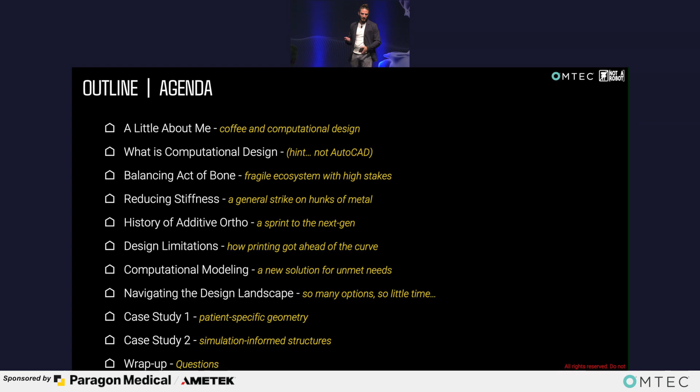Why use this as a resource versus traditional CAD? Why does it go hand in hand with 3D printing? And then we're going to go through a couple case studies. I am a daredevil, so these are going to be essentially live demonstrations. I would like to leave enough time for questions. I've got my eye on the clock for that.

So first, a little bit about me. My wife and I have 4 kids, plus one on the way due in August. We're a very musical family. I think a lot of the times engineering goes hand in hand with people who are also very musically expressive. So my wife and I have both been playing the piano ever since we were 4 or 5 years old. I like to say that my house is akin to living in a real life musical because all of my children are singing at one point or the other, and you never quite know what it's going to be.

I love coffee. So if any of you have a chance to talk to me afterwards and you're also a lover of coffee, not only do I roast my own beans, but I also have just about every brewing method of coffee that I think is out there, except for Turkish coffee. I still need to acquire that stuff there, but I love coffee.

And then, I've spent the last handful of years working in the orthopedic space, specifically on the biomimetic aspect. So it's how we use and leverage computational tools that are available to us nowadays to be able to take things that we find in nature and adapt those for human use products. So not necessarily just in the orthopedic space, but I also have actively worked in projects that are in consumer goods, wearables, filtration systems for sand filtration, as well as heat transfer systems.

And then there's just a few of the companies. Somebody once told me that recently it feels like I'm collecting companies like somebody collects rocks. So just a few companies that I'm involved in. Some of them at least are initiatives for public education. So like Lattice Robot, give it a Google. It's basically just a catalog for people that don't know about lattices to learn about lattices, and sort of a fun free project that me and a couple other people were working on.

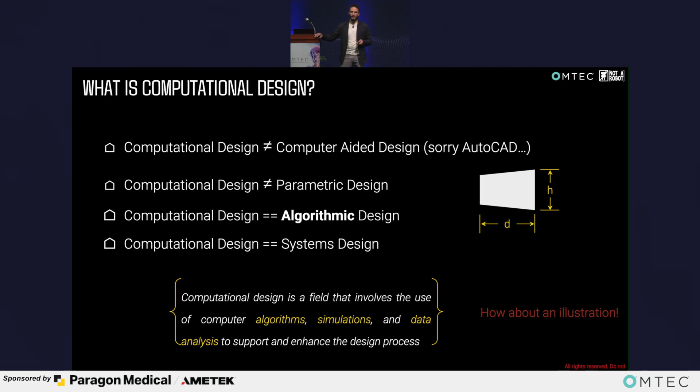Most of the workflows that I build for customers include some sort of variables where they can adjust parameters. But the way it goes about those steps is a little bit more computationally intensive. It may include simulations. It may include other calculations outside of what the engineer can directly control through data input. I'm going to try to give an example.

So I was thinking about this just the other day as I was mowing my lawn. We've got a pad that we poured. We're going to put a shed there. I don't have a zero-turn mower. I've got a lawn tractor. It's better than a push mower. But I realized that I couldn't quite mow the square perfectly, right? Because I can't turn my mower in a way that lets me cut perfectly to the corner, turn, and cut over to the next corner.

So I got to think about what algorithm or series of steps would I write in order to mow this thing most efficiently. And so the first thing I started thinking about, well, I could go straight, cut, take a U-turn, cut down the other line, and then do that essentially in a 90. What that leaves is essentially these semicircles of space for cutting. As you enhance or grow those semicircles, eventually you morph into the circular pattern or oblong pattern, since the patio is

longer in one direction. So I'd like to take this to three dimensions just to show you something that I'd like to chat about. If we can get there. So does anybody know what would happen if we added a sphere to a cube? That's a little bit of a rhetorical question. And some of you that are used to more traditional CAD might be raising your eyebrows and saying, that doesn't really make any sense. How does a sphere get added to a cube?

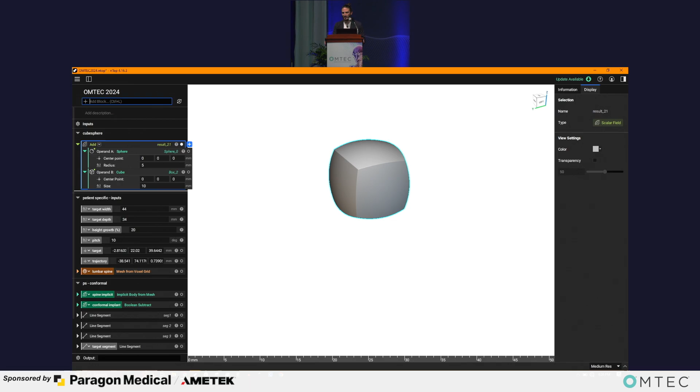A lot of the time, lattices, complicated structures, surface roughness are things that we encode with an algorithm that we couldn't possibly create by hand. These are extraordinarily complicated things. However, the downside is that it introduces a level of ambiguity into the design that the human doesn't have control of anymore. The engineer can assign and create algorithms, they can have feedback through various systems, but in order for them to have full control at the level that a med device requires, there ends up being some ambiguity. So let's say we multiply the sphere.

We're going to multiply the sphere by a factor. Let's just call it 0.5 for now. We'll assign that to a variable. And then what we're going to do is do a subtraction step, and we're going to subtract basically our factor from 1. And then we're going to do another multiplication step, and we're going to multiply our other object, the cube, by the remainder of that, and then we'll add those together.

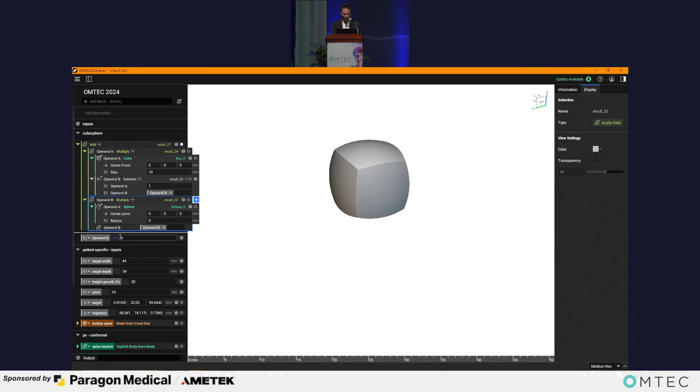So what you'll be able to see is essentially, I've not clamped this, so I'll try to be careful. But as I set this down to 0, it's a cube, and as I set this to 1, it's a sphere. Well, actually, I was hoping to do a drag and drop, but we won't clamp it. Actually, I could probably do this right here. All right. So now we can only go from 0 to 1.

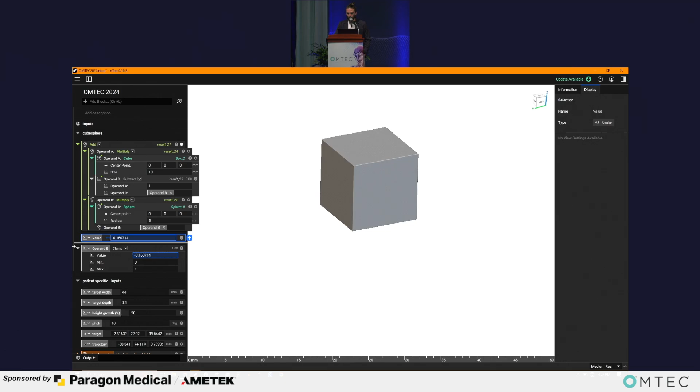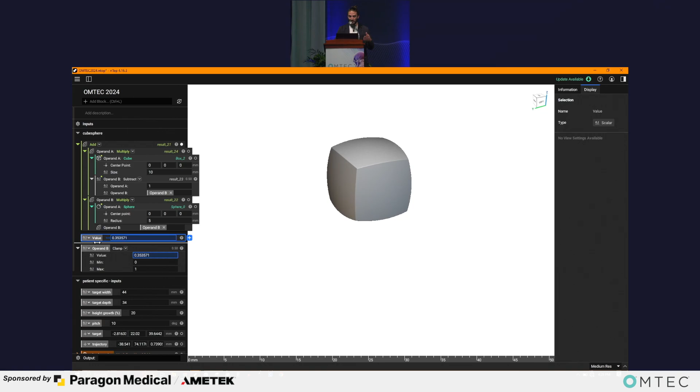So what you'll notice here when I drag between the two is we go from sphere to cube, right? If I set it at exactly 0.5, one would argue that there is equal parts sphere and equal parts cube. But in the general sense, using subjectivity here, I'm going to get a different answer if I set it at 0.4, 0.5, 0.6. Some people may still say, hey, this still looks like a cube, and we're down closer to a sphere.

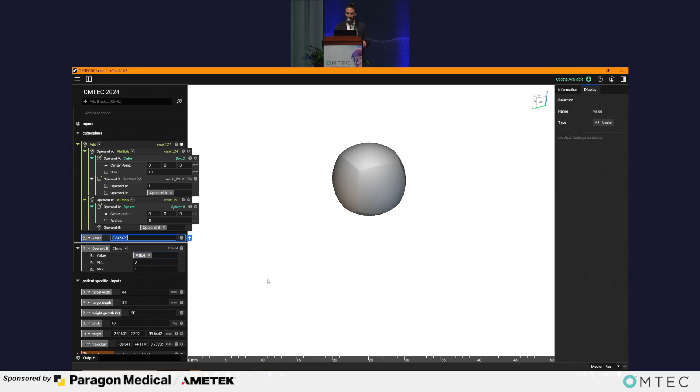So this idea that I want to drive home represents, in my opinion, a fundamental problem of the idea about computational design, which we must rectify. And it's the fact that these algorithms oftentimes are so complicated that we wrestle with how we properly define them in a regulated industry. So I would like to use this idea about the sphere cube as our nice representation. So, cube sphere. We'll call them cube sphere, or sphere cube. Whatever you want.

So how many of you guys are familiar with the idea about requirements not being ambiguous and not being conflicting, right? When we define requirements, what we need from them is that they don't conflict with each other so that all of them can be satisfied and that they're not ambiguous and too open to subjectivity. So this idea about cube sphere, I really love it because it's like, is it a cube or is it a sphere? Well, it's both, but a lot of the times in our black and white worlds, we need to force it into a box, pun intended.

So I want to revisit this down the line as we start talking about the complexity of algorithms. But first, we're going to pivot to what a lot of you will be familiar with, and that is why we need computational design in the first place. Most people are familiar with Julius Wolff's law. Basically, it's this idea that bone adapts to its local environment through mechanical loading. There's a certain amount of loading which bone likes to see. When the bone doesn't see that load, it resorbs. When it does see the load, it adds to itself.

Less people are familiar with the work of Harold Frost and the Frost mechanostat theory, which further expounds upon this general idea. And it's that there is a mechanism by which this stress and strain is monitored, and relates that to what happens in the biology of bone. And the modeling adapts to certain types of overloads, and it will remodel where it needs to. It'll take away where it needs to.

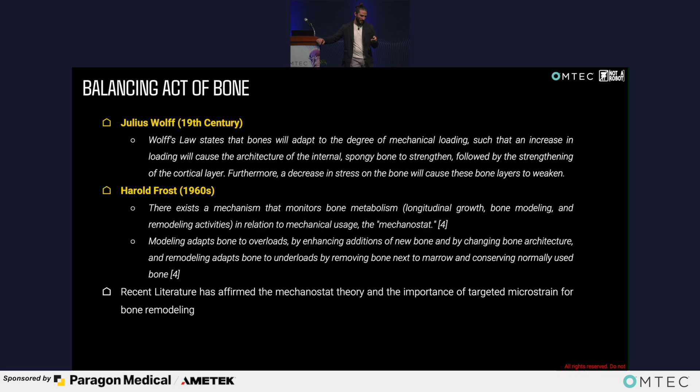Recent literature, I think a paper published in 2023, has affirmed this mechanostat theory, and researchers are still arguing about the nuances, but most people are aware that certain rates of strain are better. This is one of my favorite graphs. I love talking about it, because when we design implants, they are surrogates, right? What they intend to do is replace a portion of the body. But most of the time they do so poorly, at least biologically. They don't operate as well as what used to be there.

I apologize, I'm gonna get my phone out because I'm prone to babbling. And I wanna check the time.

So this idea that we have an overload zone where the bone actually starts to remodel itself, most people are familiar with. When we design an implant that replaces that, and we use a material that's not bone, in the vast majority of cases, there's a stiffness mismatch.

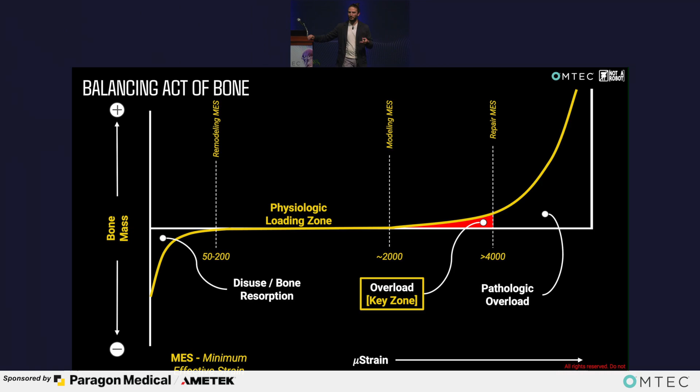The other thing that a lot of people probably realize if you told them, but don't necessarily when they're designing it, is the fact that we're designing static things to go into a living system. Bone, if we're trying to truly mimic bone, the trabecular nature of bone has the ability to resorb itself where it sees a fracture, right? If it sees loading in a certain spot and not loading in a certain spot and it fractures, it's going to resorb itself to make use of those materials somewhere else.

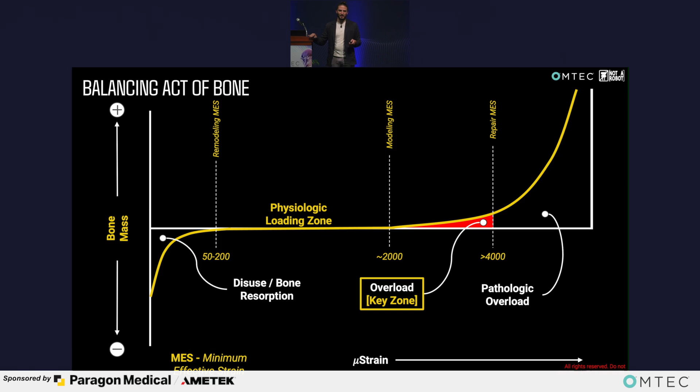That's not available, at least not in the current technology with computationally designed products. So we need to be a little bit careful, in my opinion, when we design these surrogates, that we don't necessarily just say, hey, this looks like trabecular bone. Well, great, it's titanium. So what's the point?

Let's measure the output. To further expound on this, study after study have sort of confirmed that it's so very important to understand what happens to the body at the macro, micro, and nano level. And this stuff has been pounded into most people's heads that have been in the industry. So this idea that cyclic loading of bone at less than 1% of the ultimate strength can cause measurable differences. So we're not even talking about a ton of load. We're talking about this idea about microstrain and microstrain's ability to remodel.

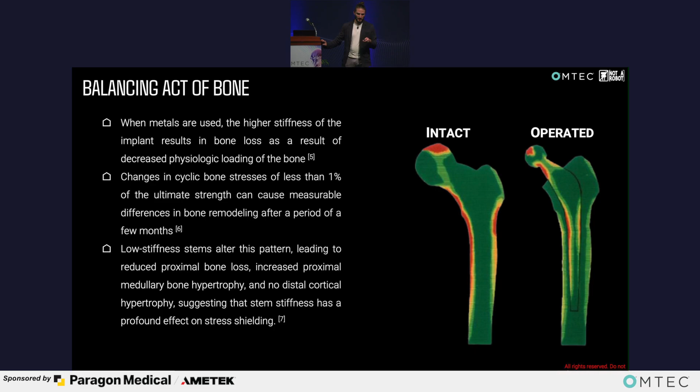So when we have any material that's a modulus mismatch, and I don't care if it's PEEK, I don't care if it's titanium, I don't care if it's some other type of surrogate, even an allograft, any mismatch in the local native bone, because remember, bone is not a static material modulus. It changes over time and space. So this idea that the stiffness of the thing that goes in it has a profound effect on this kind of stress shielding.

And so why is it important? Why is computational design and additive manufacturing important? Why have we seen an explosion in the growth of it? It's because of this idea about reducing stiffness. Reducing stiffness and integration into the local anatomy.

So the early 2000s saw the rise of PEEK. And most of you guys are familiar with that. I was talking to some of the others today, and I think PEEK sort of had its heyday in the mid to late 2010s, where it represented the vast majority of implants in the spine space that were going into the bodies. The stiffness reduction was great over titanium as a raw material, and although it was biocompatible, after a few years of usage, people were starting to realize that it lacked the osteogenic capabilities of titanium.

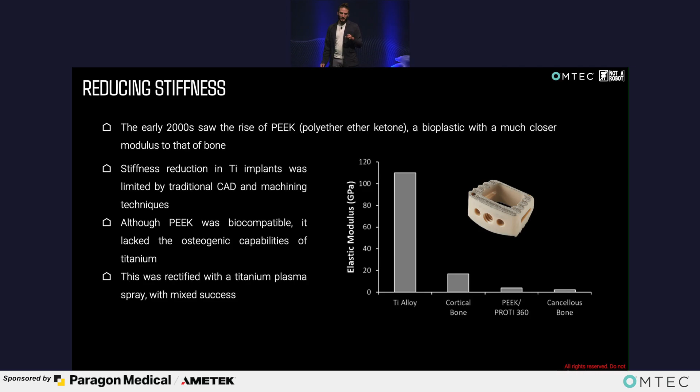So whereas titanium is a generally osteogenic material that bone likes to attach to, it likes to integrate to, PEEK was not that. So although there were certain technologies, spray technologies that had been added, different coating technologies, it sort of fell out of favor a little bit, and we started to see the rise of titanium again.

How many are engineers in the crowd? So a good handful. How many of you guys have ever tried to design a complicated structure using parametric CAD? Like in SolidWorks, let's say. I want to design a series of lattices I'm going to cut or pattern. There eventually becomes a problem with that.

Now, I'm not going to give a spiel on a particular type of additive software or the other, but I will say that parametric boundary representation design struggles a lot with complex structures because you're using points, vertices, lines and surfaces in space to represent what could amount to hundreds of thousands or millions of surfaces in some cases. So there was essentially this new technology with this crazy amount of ability to realize these new structures, but the design tools remained largely parametric.

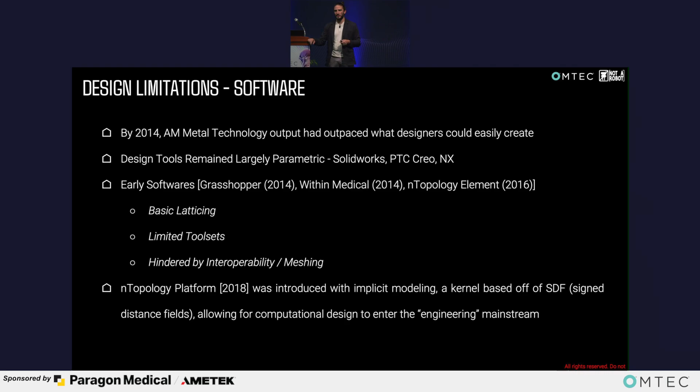Early softwares: Grasshopper, which is largely used outside of the med device community; Within Medical, which a lot of early stage AM and orthopedic device adopters got onto, nTop Element: basic latticing, limited tool sets, hindered by interoperability. One of the flagship products that brought computational design, in my opinion, into the engineering mainstream was nTop Platform, which is now just called nTop.

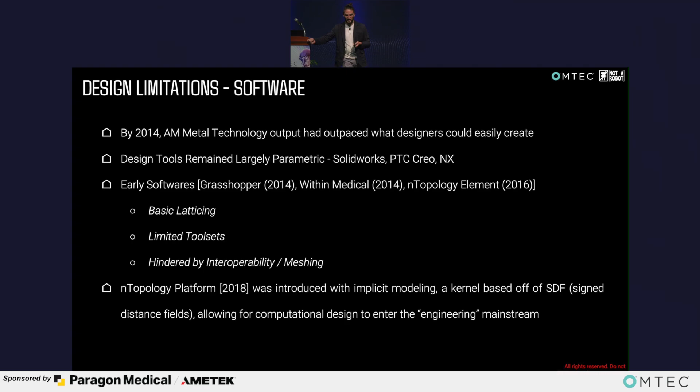It used a kernel called implicit modeling, which is basically a mathematical representation of the structures, as well as what's called signed distance fields, which, again, I'm not going to bore you with the details, it's just a different way to represent objects in space, and it makes things like complicated lattices and surface roughness possible.

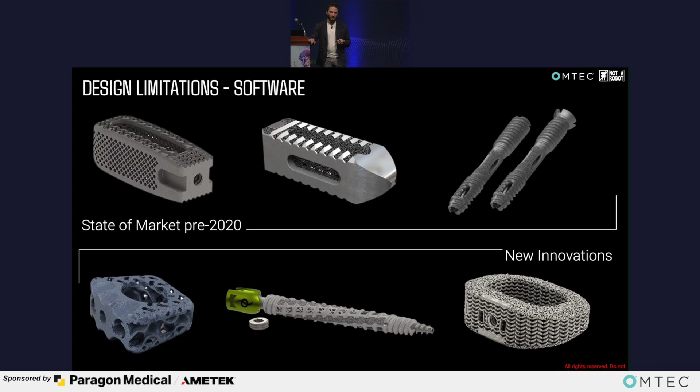So the initial limitations I'm showing here, no knock on anybody's products if you see them here, are from what was considered pretty state-of-the-art back in the 2010s. Fairly basic geometries. The lattices all used the exact same algorithm called a Voronoi, if they even had that sort of technology. And you had some basic surface roughness. Now you have the ability to utilize this field-based design to create designs which would have been unthinkable even 5 or 10 years ago. Just some really cool stuff.

So I apologize for the wordiness. I'm going to try to summarize this. This is talking about some of the limitations that are regulatory in nature. I by no means am a regulatory expert, but I have beat my head against the FDA wall on plenty of products over and over again. So I have a pretty good understanding of the framework of this kind of a problem.

Most people are familiar, and I'm going to use interbody devices as an example, with the fact that you've got to pass some testing to get to the FDA. Most people, I don't think, realize the difference between the FDA-required testing and an anatomically relevant loading condition.

So the equivalence idea is basically that any devices that were legally marketed prior to May 28, 1976 were considered in, right? They were good to go. There was enough history in the field for them to say good enough. Everything that's been cleared since must be equivalent to that. So there's been a chain of devices that you can claim equivalence on, but all of them lead back to essentially this FDA Act in 1976.

Here's, in my opinion, the problem right here. This idea about what is an anatomically relevant loading condition, what you can put in there as an implant which should be good enough, and then what is required as a bar by the FDA. The fact is that even by conservative estimations, the numbers are off by about 10 to 25 times in most loading scenarios. And why is that? Well, most of the devices that we're comparing ourselves to were already too strong. They were just hunks of metal.

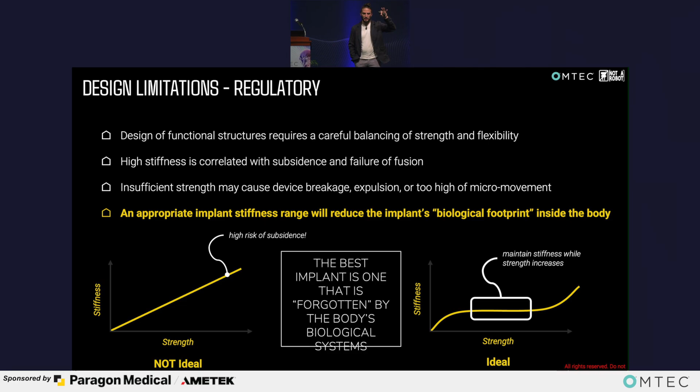And again, I'm an advocate for additive devices. I'm an advocate for computational design. So of course I'm going to frame the problem as like, this is ridiculous. Is it necessarily that bad? Probably not. Obviously this is a little bit for the presentation. But the fact is there's a wide gap in what the body sees forces-wise on a day-to-day basis and what we design products for. So the other thing is, again, no two anatomies are the same.

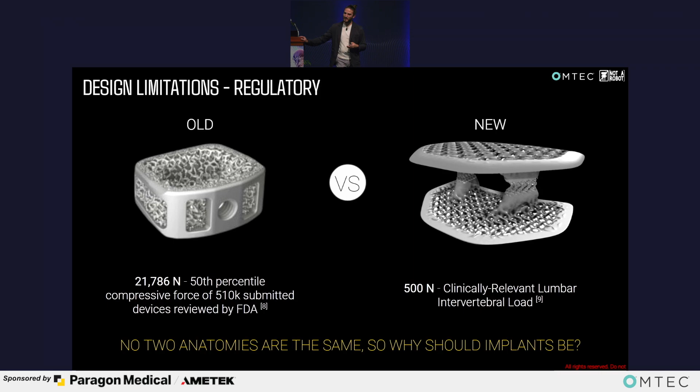Duh. The geometry is not the same. The loading conditions are not the same. People are different sizes and shapes. Their body is different sizes and shapes. So when we think about a parameterized design, even if we fill that parameterized design with as small steps as possible, heights, widths, lordoses, we still don't necessarily get a match, any at all. There's never an anatomical match. So computational design is something that we can use to basically be able to do that.

So what's the solution? Computational modeling just allows for the creation of ordered and random structures to decrease stiffness. It allows us to grade those structures, density, and morphology in order to be able to adapt to various loading conditions. The FEA portion allows us to basically use FEA, which is essentially modeling of those structures digitally, as a feedback loop back into the parts themselves to be able to inform the design process. Again, either as you're doing your iterative development or as part of the patient-specific process. And then the computational modeling allows us to compute massive data sets.

So again, most of you guys probably are fairly smart. I like to consider myself fairly smart, but there's not one human that can process a table that's 100 by 100 very quickly, let alone 1,000 by 1,000 or 10,000 by 10,000. But essentially, that's what these things can do: they can use analytics, statistics to basically process massive data sets that are able to inform the designs.

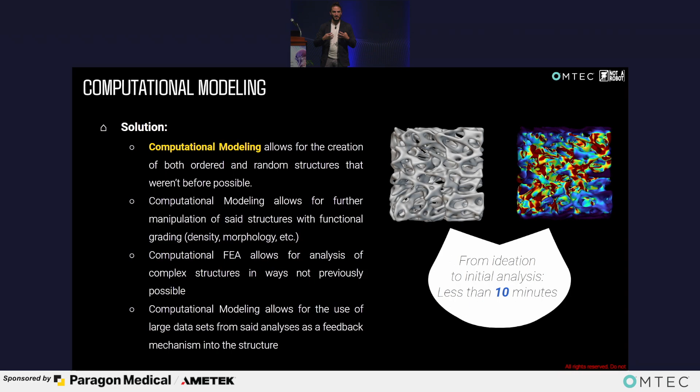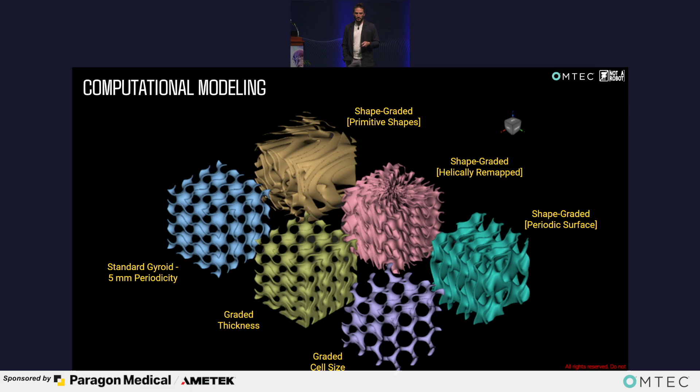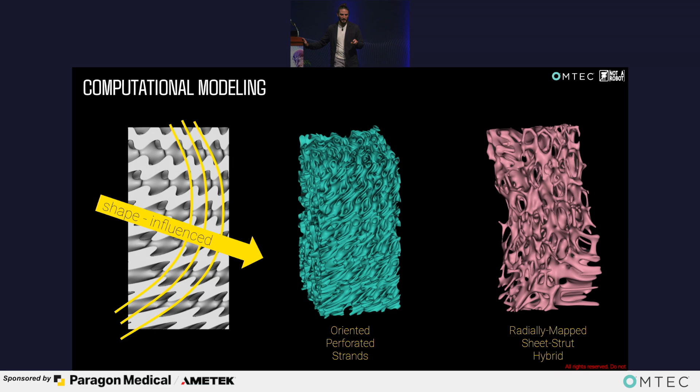Just a quick idea again. A gyroid structure, some of you guys are familiar with triply periodic minimal surfaces, TPMSs. The ways that we can manipulate that, 6 ways, look entirely different, but we can shape-grade it, we can remap it, we can grade its thickness, we can grade its cell size, and we can also create what I would consider more true bone surrogates than what's currently available in a lot of those cases.

A quick idea about intentional structure design. So stochastic lattice, I would say, again, cursory review, probably exists in close to 50% of cages that are out there on the market. A lot of people call it stochastic. Some people call it by its name, which is the Voronoi algorithm. I get a little triggered when I hear it called trabecular, because it's not trabecular bone. Again, personal opinion there. What we're doing is we're just comparing it to two things that occupy the exact same volume fraction. So when we compare the stiffness of structures, we like to be able to have a level playing ground, right? So it's the exact same volume of structure occupying the space.

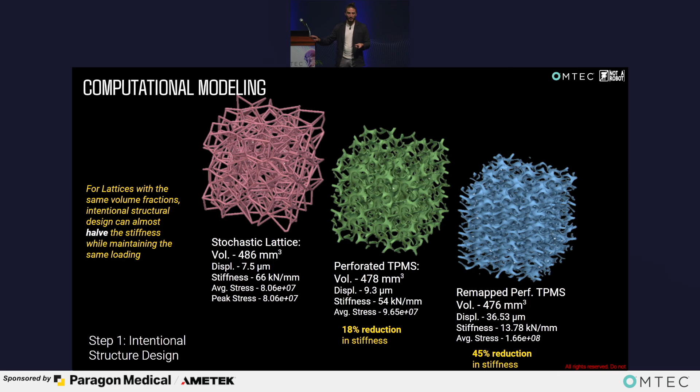So perforated TPMS structure, again, exact same volume, 18% reduction in stiffness. If we remap, and essentially we take the structure and we sort of morph it in space a little bit, we can now achieve a 45% reduction in vertical stiffness. Again, exact same representation of volume. If we take that design even further, now again, we're going to also want to balance, well, all right, great, Matt, the structure is flexible. Who cares? Does it actually hold up to the loading?

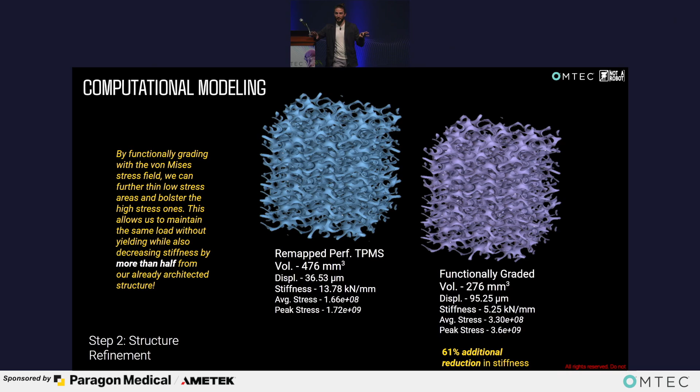So by making slight changes, functionally grading the material of the device away from areas that see no stress and into areas that do see stress, we're able to drop the volume further and then decrease the stiffness by 61%. So in this case, you can see we dropped the volume 476 to 276. And what we did is we moved material into places where it needed to be and took material away from places that it did not need to be.

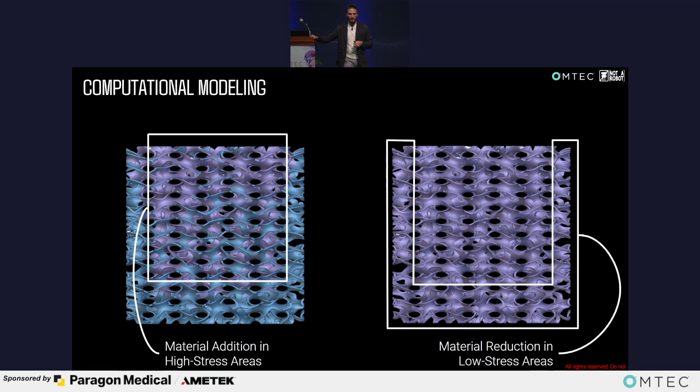So here's a quick cross-section showing the difference between the two. It's really, really small. Most people would be surprised at how small an amount of material needs to move from A to B in order to fundamentally change the stiffness and or other properties of a structure. But again, with the computational modeling aspects, we are able to achieve these with a high degree of accuracy and be able to, again, do things that were previously not thought possible.

I'm part of an initiative, a project called Lattice Robot. So what we're attempting to do is categorize all the lattices that are out there. Every single permutation of lattice, every single functional permutation within that lattice, cell size, shape, grading, things like that. Most of you guys are familiar that there's a material library, right? And properties of material, I mean, how many people haven't Googled what's the properties of titanium? I do it every other day, because I can't remember that.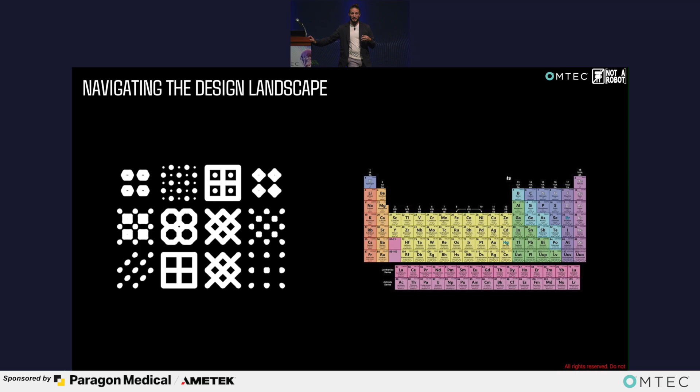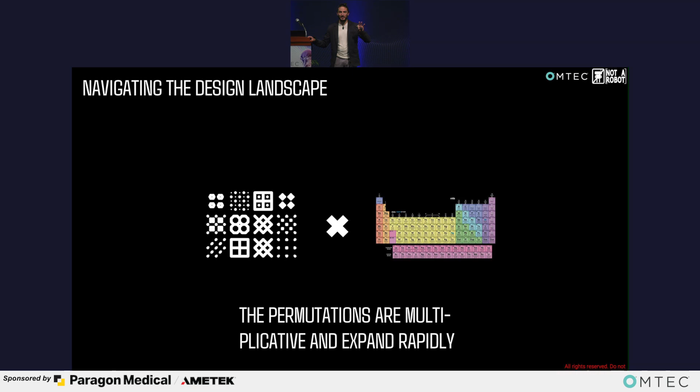Now you talk about this use of metamaterials, lattices, and the fact is that they're multiplicative. You've got base substrates that you want to melt parts out of in 3D printing, and now you have all of these available lattices to you. So again, within one lattice family, TPMS, let's say, there are something like 75 known triply periodic minimal structures that have been modeled. And inside each one of those structures, you can change the cell size, you can change the thickness, you can adapt and grade it in various ways. And so now you've got access to tens of thousands or hundreds of thousands of unique variations or permutations of structure.

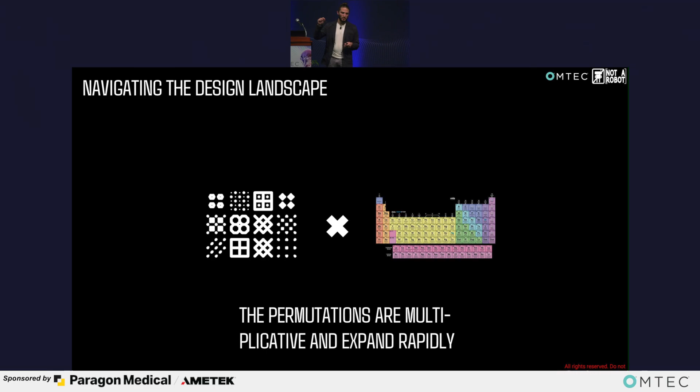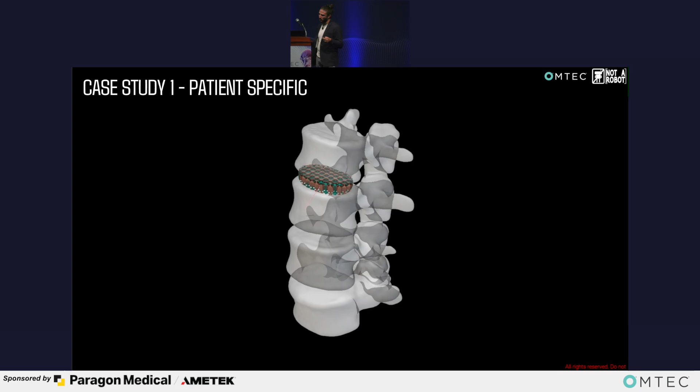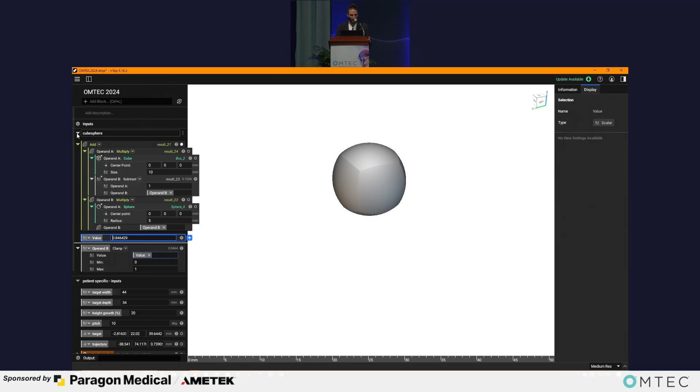So I'd like to just pop to and show a couple things real quick. Live demos, so to speak. So the first one we're going to look at is this idea about patient-specific. Most people are familiar with patient-specific, the general idea, and the fact that we can create conformal geometry. So in this case, we've got a nice conformal implant. I just want to show you how quickly you can adapt an implant in the space. So this is an implant that's perfectly conformal to the top and the bottom. We've got some target widths, depths, various height metrics, as well as pitch.

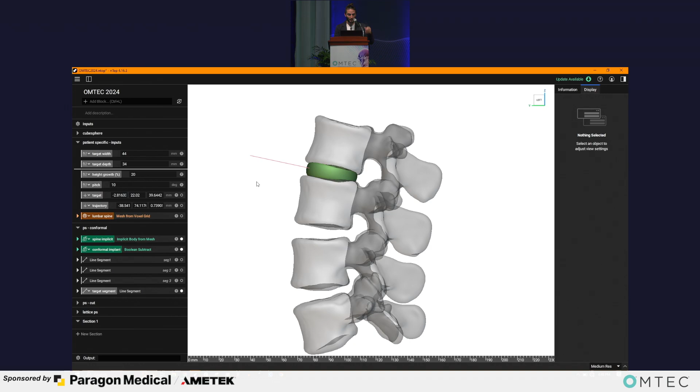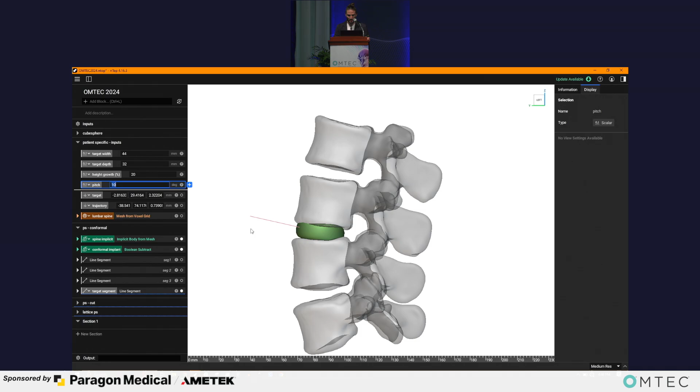I'm going to highlight the trajectory that the implant's going to be inserted at. And we're going to move the target to a different segment. So the target in the different segment, we'll notice here, hey, I didn't quite place it right. That's okay. I'm going to go ahead and scoot it back a little bit. I'm going to decrease the target depth to something that's more anatomically relevant for that segment. And then I notice that my pitch is a little bit high for my targeting, so I'm going to set that to 0 and now pitch the implant.

What I think is incredibly cool is the fact that it doesn't have to be a one-size-fits-all. So in some cases you say, all right, conformal geometry, cool. There are people that are doing that. Carlsmed comes to mind, with the ability to match the bony segments on the top and the bottom vertebral bodies. But there are a lot of cases where that's not necessarily the ideal scenario. Maybe I want to do a rasp of the space, and that way I can confirm that my end plate to end plate is going to be a nice amount. So in that case, that's fine.

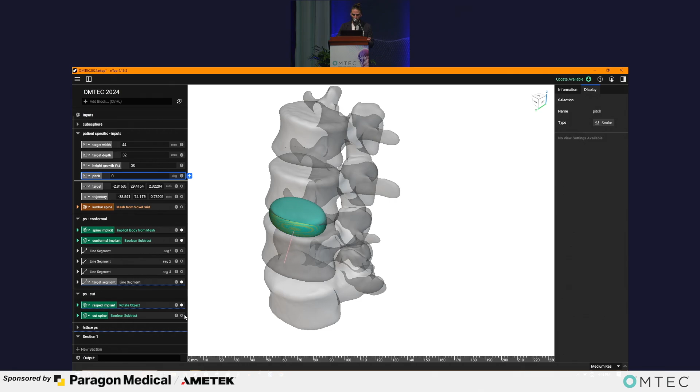We can essentially create cut geometry that can operate the same way. So the cut geometry can essentially take our target, and it can create a cut path, right? A surrogate cut path, and it can size the implant appropriately for this space.

So again, simple example, but you can see the idea behind taking a patient scan in, being able to set a target point within a workflow, instantly get something that conforms to the anatomy, and then set up another key couple of rules to be able to create things incredibly fast. So this is, in my opinion, one of the huge advantages of computational modeling.

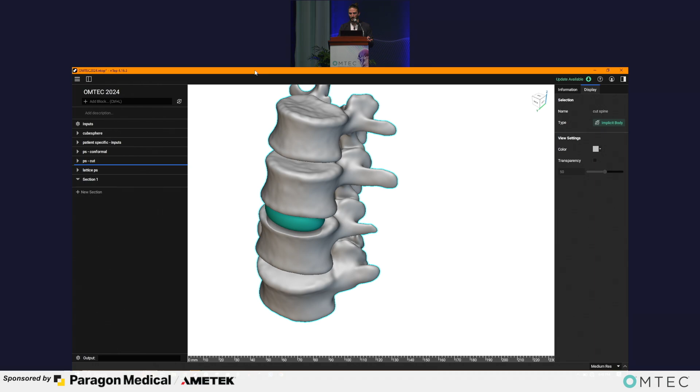Whereas before, having to take each individual piece in, put it in the right spot, segment it, do some sort of a subtraction operation to get it in the space, is something that would be a lot harder to execute on. The second thing that I would like to chat about is this idea of adaptive stress. Most people have started to pick up on the idea that computational modeling can be combined with FEA and various solvers to further augment what we're capable of.

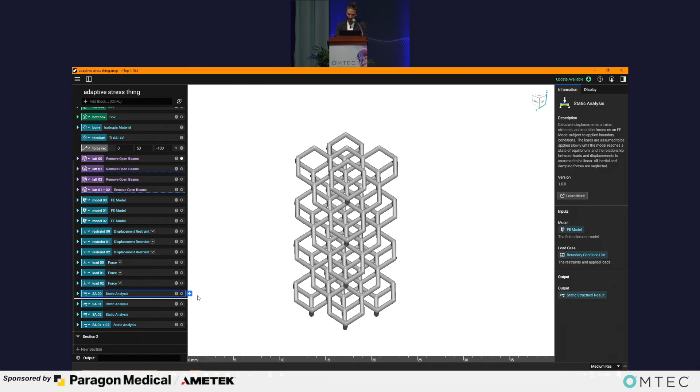So this is just a simple example. I'll actually be further expounding on this at the Computational Design for Additive Manufacturing Symposium, which I think is sometime in October. And this idea about adaptive stress structures. So we've got a first structure. We're going to load it with a force. We'll look at that initial analysis. You can see here, nice and springy, basically deformed.

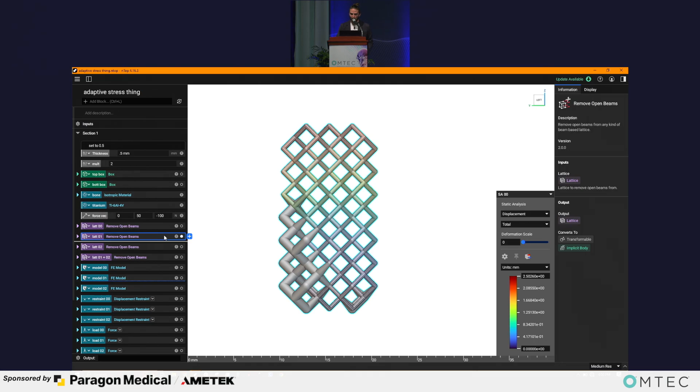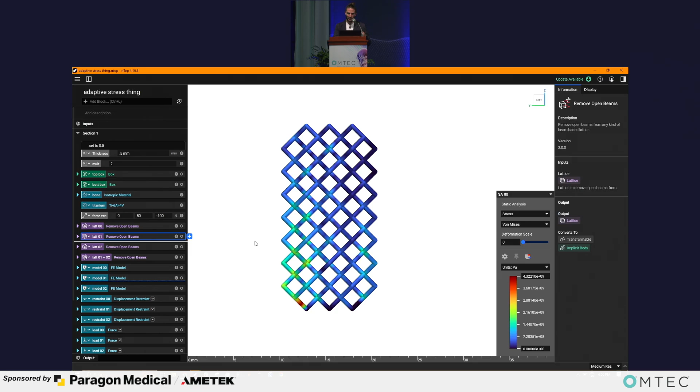And this idea that we've got a particular vector, and what we're going to do is use that vector field and the stresses to define what happens to the structure. So we can essentially remove areas of the beams. We can adapt areas of the beams that are seeing higher stress than others. So the first is, all right, we've got this piece right here. What happens if I load it again?

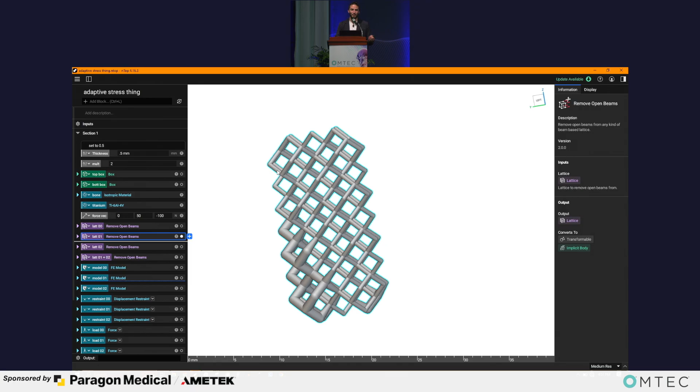Because I see this a lot in a lot of people I talk to. Most people see stress in an area on a lattice and they say, well, just put more material there. The thing is, the stress moves around. It's going to move to a different spot that's weaker. So in our second iteration, when we go ahead and run that, say, okay, well, we solved the problem. We put material where it was stressed.

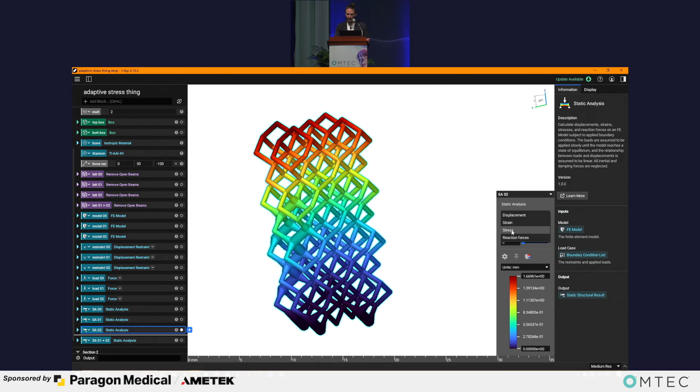When we look at this analysis, what we see is that we're still seeing areas of high stress. In some cases, it's at fringe or border cases. In some cases, it moves. If we attempt to re-thicken other areas like that and use the new stress field as our new target, then again, what happens when we test it? Well, now we've perpetuated the problem back to areas that the stress wanted to go through in the first place.

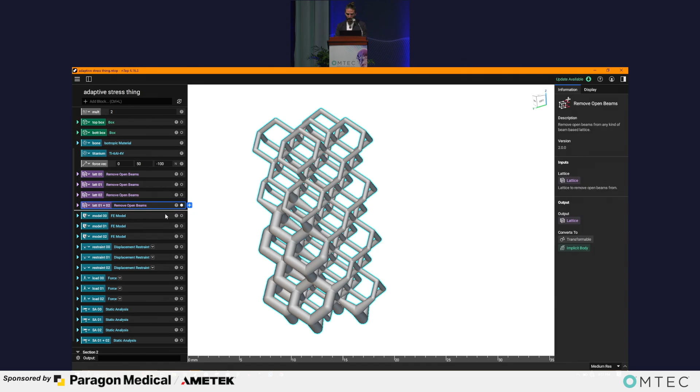When we use computational design, we can essentially inform as an iterative loop what happened the last time, so we can continue to adapt. So in this third iteration, it's basically, all right, remember 1, remember 2, now create a third structure that's based upon both 1 and 2. When we create an analysis of that, the analysis is perfect. Everything is under the yield point.

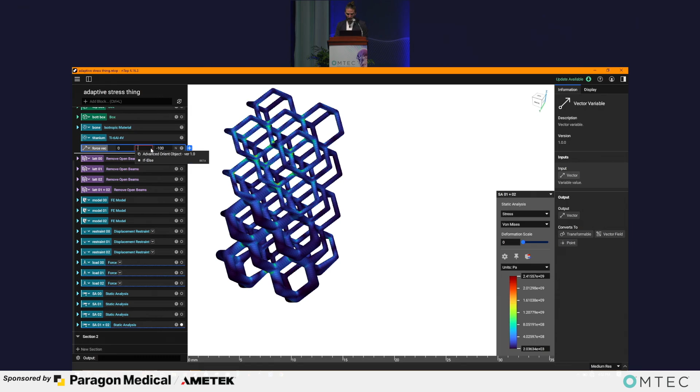And what I think is incredibly fun to illustrate is if I decide that this particular orientation or the loading wasn't exactly what I needed, then I'm just going to change the load. So computational modeling in a lot of cases is really, really fast. What used to take a long, long time, meshing algorithms, performing simulations, now can be done at a fraction of the time. There are certain meshless simulation procedures which allow us to take implicit level geometry and perform those series of calculations to get to our final iterative solve.

And again, any of you that are really deep into FEA know that this kind of thing has evolved incredibly rapidly in even just the last several years with the techniques that are available to us. So as I close out the demo portion, again, simple examples. I didn't necessarily want to go hyper deep into specific applications.

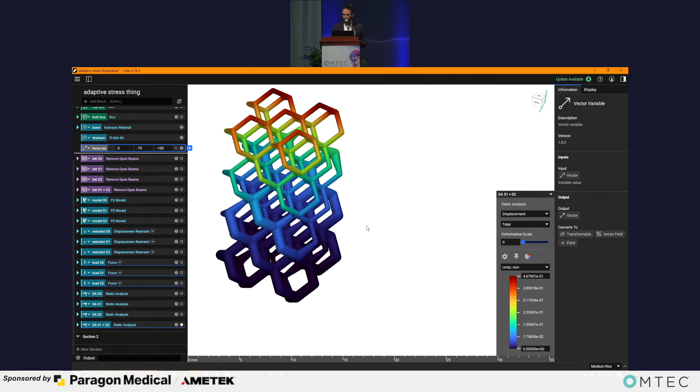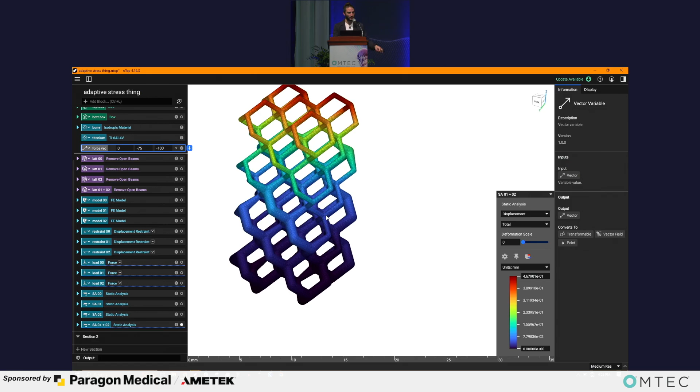But this idea, again, that we can take parts themselves, load them, put them into the space. And what you've seen here is that I've just changed the orientation of the structure. So instead of it being negative in a certain direction, it's now positive. And now we've completely changed the look of the structure through an adaptive, informative, iterative loop in our process. So again, one of the super powerful things that we have.

The last thing I wanted to go over is this idea like, hey, we're doing a lot of traditional design. We started getting into 3D printing. We've got a handful of designs. What should we do next? And the learning curve in a lot of these softwares is pretty steep. In some cases, it's a little more general. But if you're wanting to design something that's truly cutting edge, it's like, what do I do?

Well, again, first I would recommend get a good fundamental understanding of what a lattice is. What do these structures do? What can I use them for? The domain knowledge is incredibly deep because we've only talked about a lot of structural problems. Once you incorporate the biological aspects, the pore size, the roughness at both the macro and micro level, our ability to use surface texturing as implicit fields to create these novel surfaces, it gets pretty deep.

So the first is understanding, again, what does bone need? What does it want? The cool thing is there have been hundreds of papers in the last 5 or 6 years specifically on additive in the orthopedic space. A lot of people are interested in it. So I would say that's a perfect aspect of something to do.

The next is, don't necessarily hesitate to invest in the tools of today. Most people are like, I got traditional CAD, I'm already paying for it, why do I need another software? And the fact is that, in my opinion, a lot of these softwares will stay pretty parallel to some of the traditional parametric CAD tools. Those aren't going to go away, but not having them in your portfolio from a development standpoint, as we start to see the world of lattice explode.

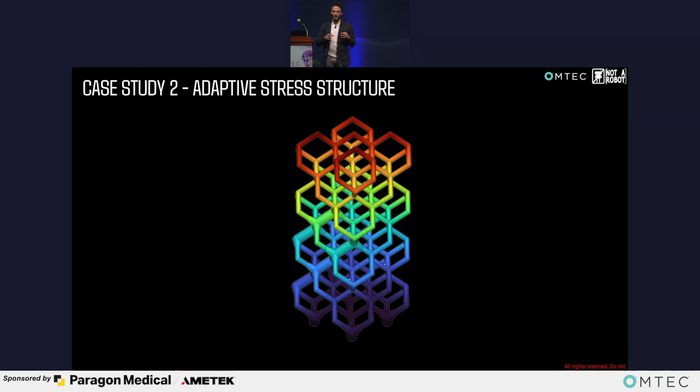Again, I'm an advocate, I'm kind of an evangelist for this idea about lattices, but not just me, there's a lot of other industries that are prime for the metamaterial space. Lattice being a fairly colloquial term, but this idea about metamaterials. So metamaterials, now structural, also biological, heat transfer, vibrations, optical. There's a lot of different ways that these things can be applied.